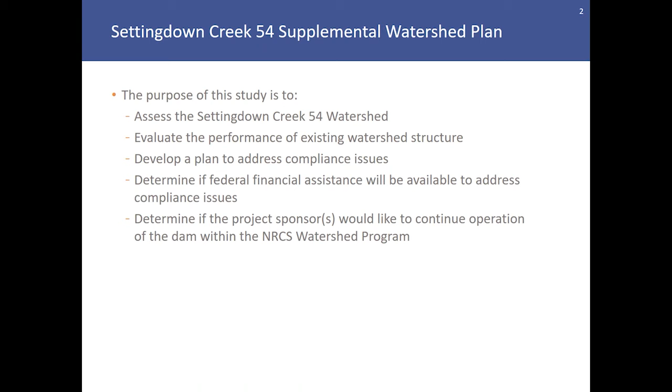The purpose of this planning study is to assess the Settingdown Creek Dam 54 watershed, as well as evaluate the performance of the existing watershed structure. The planning study will develop a plan to address any identified compliance issues with the dam and determine if federal financial assistance will be available to address those issues. Also, the planning study will result in the determination of whether or not the project sponsors would like to continue operation of the dam within the NRCS watershed program.

Public participation is of great importance to the planning process. The objective of our public participation plan is to inform you and other watershed stakeholders of the planning effort. A series of public meetings are required.

The first and second public meetings included a brief history of the NRCS watershed program, a brief history of dam safety, considerations for dam design, operation, and maintenance, an overview of the Settingdown Creek watershed and the dams included in this planning study, and also concluded with an opportunity for the solicitation of questions and comments regarding scoping topics and project opportunities and concerns.

The second public meeting included the presentation of a list of potential rehabilitation alternatives for the dam. The first public meeting was posted to Schnabel's YouTube channel from August the 7th until August the 17th, 2020, and the second public meeting was available from December the 18th until January the 4th, 2021. Please note that the first and second public meeting presentations have been reposted to Schnabel's YouTube channel for those interested in viewing the presentations and the content described above.

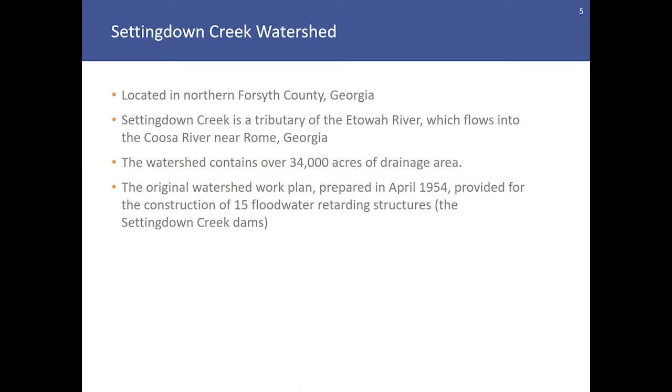The Settingdown Creek watershed is located in northern Forsyth County, Georgia. The creek is a tributary of the Etowah River, which flows into the Coosa River near Rome, Georgia. The watershed contains over 34,000 acres of drainage, and the original watershed work plan, which was prepared in the early 1950s, provided for the construction of 15 floodwater retarding structures known as the Settingdown Creek dams.

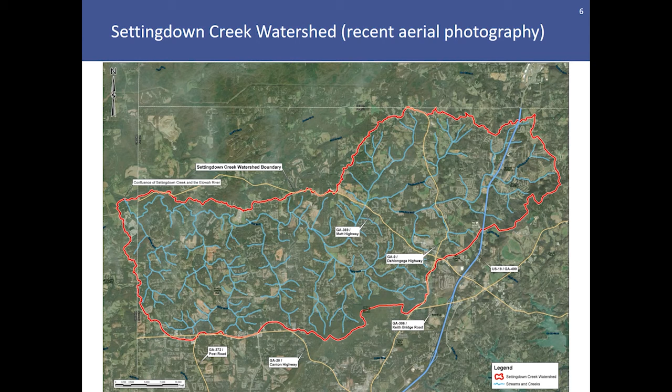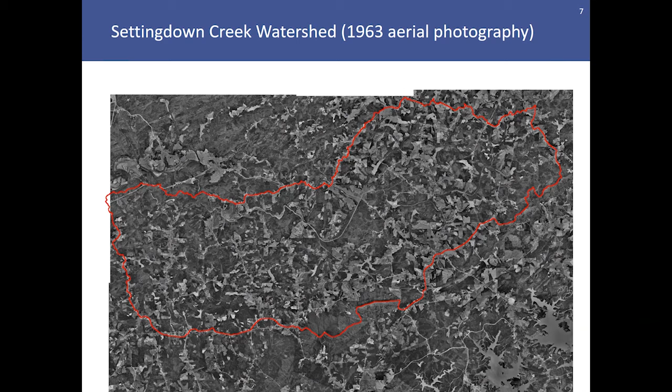This slide presents a delineation of the watershed overlain on aerial photography from the early 1960s, which would have been taken shortly after the construction of most, if not all, of the Settingdown Creek dams. As you can see, there have been some changes to the land uses in northern Forsyth County within the watershed since the original construction of the dams.

As part of the supplemental watershed planning study, several focal points of analysis and study are involved. We, the planning team, considered upstream areas that are subject to flooding, as well as the need for potentially needing additional storage upstream of the dams. We also looked at downstream areas with regard to storm flooding, as well as hypothetical breaches of the dam and the areas that would be impacted as a result.

The hydraulic capacity of the existing spillway outlet works was assessed and evaluated for several different storm events. Additionally, economic and social benefits associated with the project were considered, along with an assessment of environmental and cultural resources in the project's vicinity.

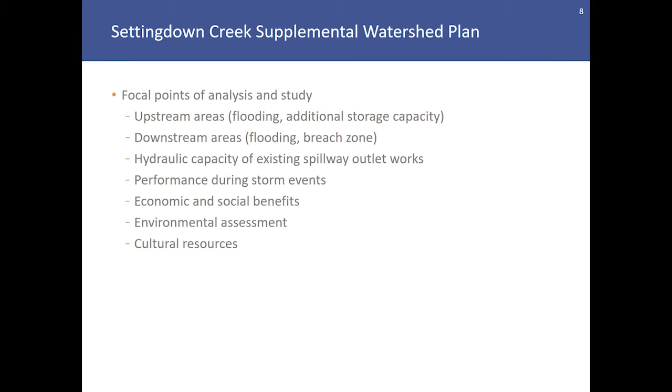With regard to Settingdown Creek 54, which is the subject of this presentation, the dam meets Georgia Safe Dams Program criteria to be considered a Category 1 or high hazard potential dam. This means that failure or improper operation of the dam would likely result in the loss of human life. The dam requires an operating permit from the Safe Dams Program.

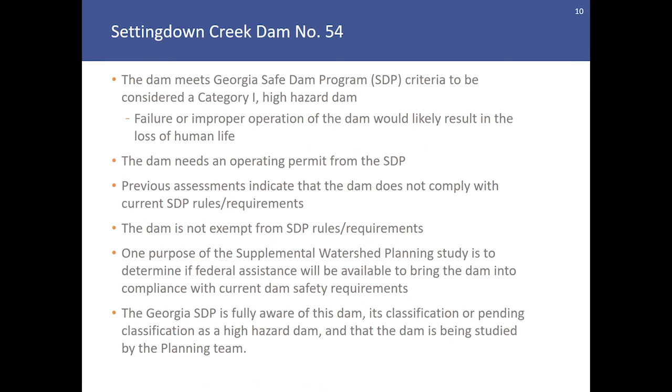Previous assessments of the dam indicated that the dam does not comply with current SDP rules and requirements. The dam is not exempt from these rules, and the purpose of the planning study is to determine if federal assistance will be available to bring the dam into compliance with current safety requirements. The Georgia Safe Dams Program is fully aware of this dam, its classification as a high hazard dam, and that the dam is being studied by the planning team.

Original design features for Settingdown 54 include that the dam was not originally designed as a high hazard dam. Development downstream of the dam has occurred since its original construction, increasing the hazard classification from low or significant to high hazard. The purpose of the dam is flood mitigation, with a secondary purpose of sediment accumulation and storage.

The principal spillway system for the dam is comprised of a reinforced concrete riser structure and nearly horizontal pipe or conduit that conveys flows from the lake through the dam to the outlet channel at the downstream toe of the dam. There's also a vegetated earthen auxiliary or emergency spillway located adjacent to the dam to convey flows associated with low frequency, high intensity storm events.

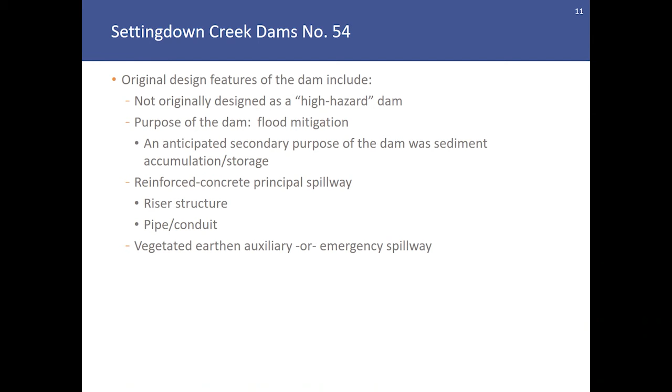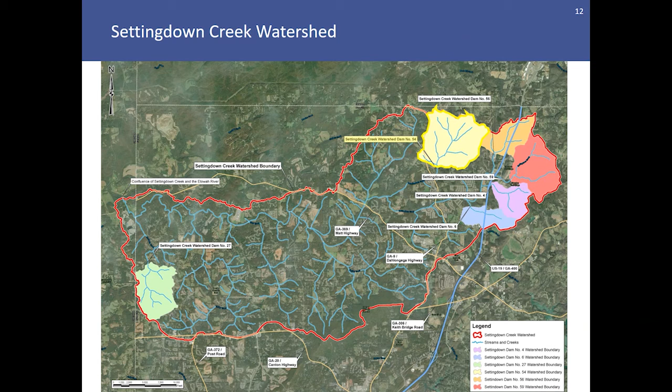northeast side of the watershed in this view. The dam is located north of the intersection of Dahlonega Highway, Highway 9, and Burruss Road. The dam was constructed in 1954 and appears on the National Inventory of Dams. It has a surveyed height of approximately 27 feet and a drainage area on the order of 2.5 square miles.

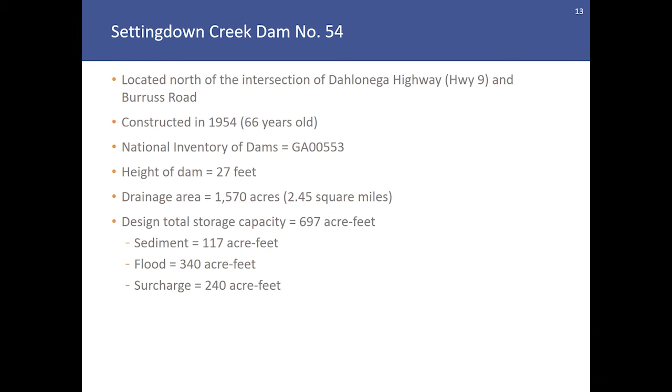The total storage capacity that the dam was designed to have is 697 acre-feet. That includes sediment storage, flood storage, and surcharge flooding storage above the auxiliary spillway control section.

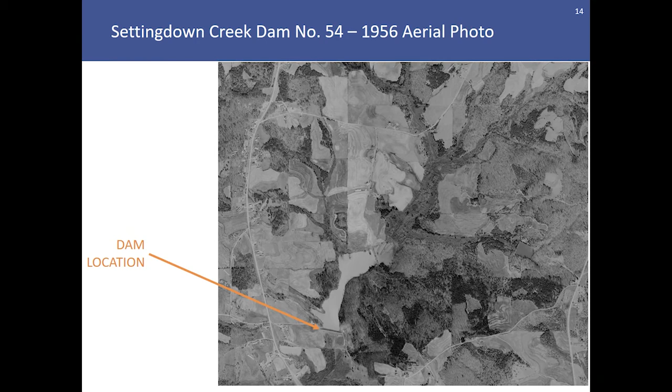This slide presents an aerial photo from the 1950s, which would have been taken shortly after the completion of the dam. You'll note the location of the dam and the areas surrounding it, and we'll fast forward to an aerial photo taken more recently and note that some development has occurred both upstream and downstream of the dam since its original construction.

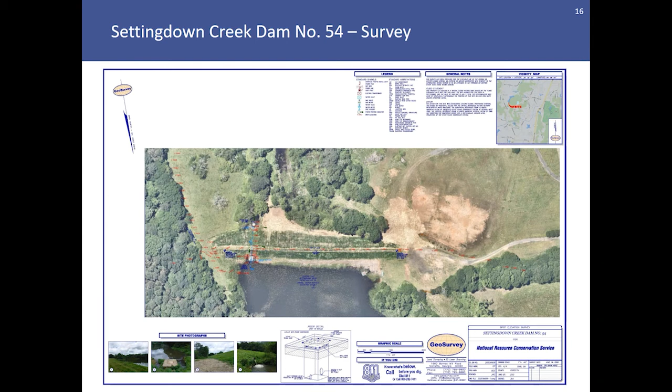The auxiliary spillway channel, the vegetated spillway, is located to the left of the lake in this view and generally runs in a bottom to top direction from this view. You'll also notice that the dam has been cleared and the lake is at the bottom of this view.

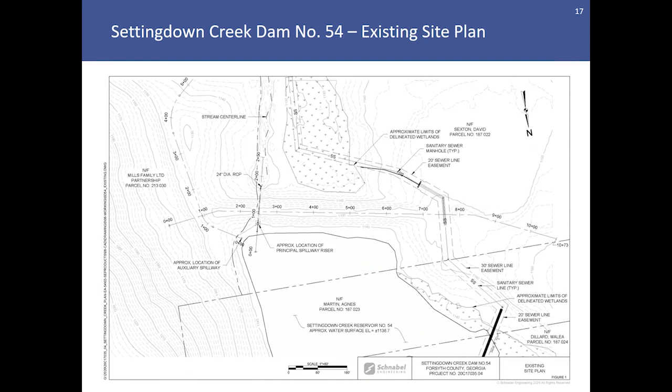Also of note, there is an existing sanitary sewer line that runs immediately to the right of the dam in this view and then turns down into the floodplain and runs relatively parallel to the outlet channel for the dam.

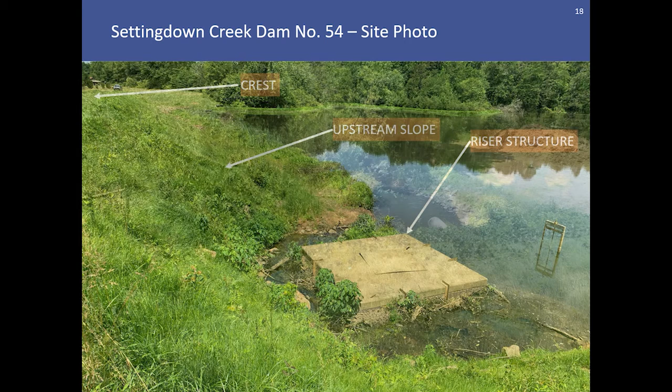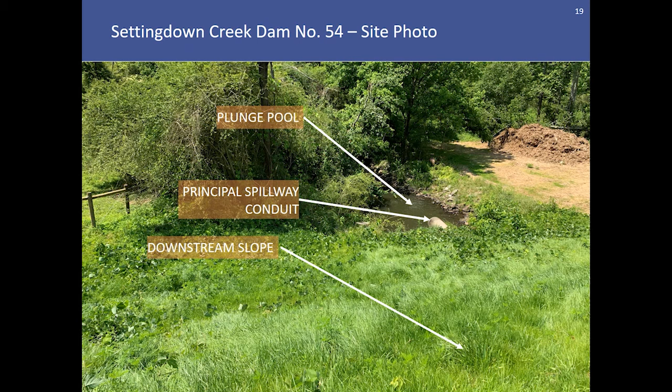Some invasive species, predominantly Chinese privet, were identified in the upper reaches of the watershed for this dam. The environmental survey resulted in the finding of no protected species in the vicinity of this dam.

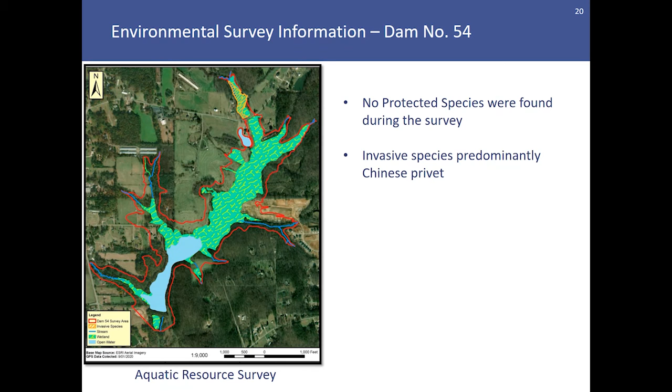The dam, being greater than 50 years old, is technically eligible for the National Register of Historic Places. However, the Cultural Resources team does not recommend placement of the dam on the registry. No additional cultural resources work is recommended for this dam.

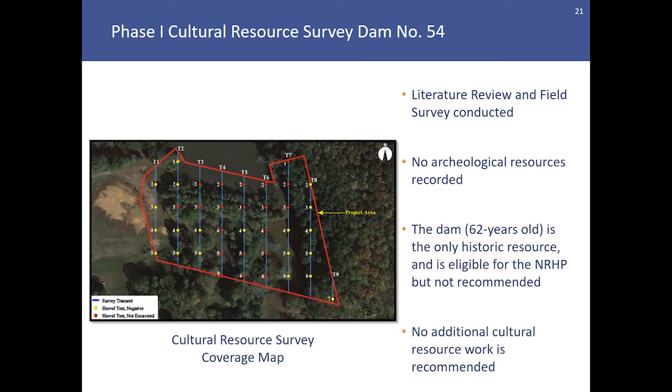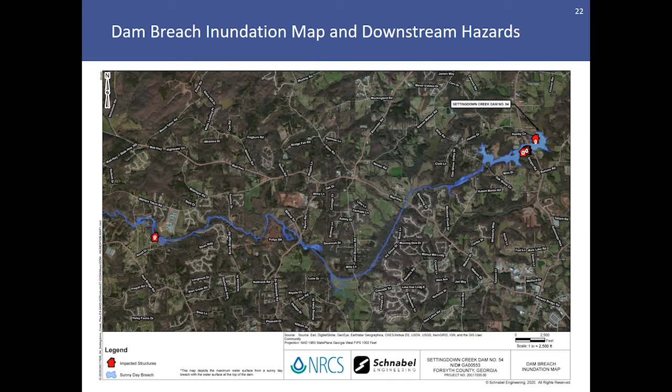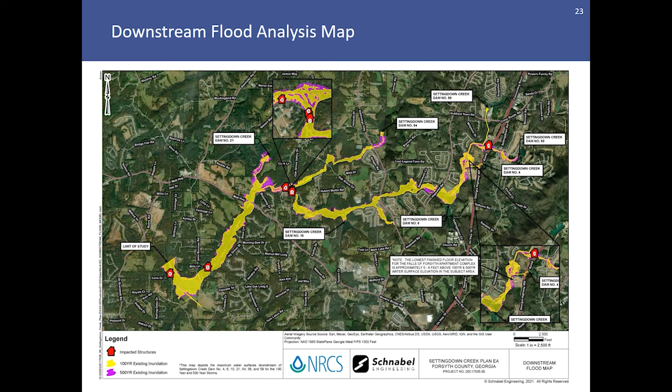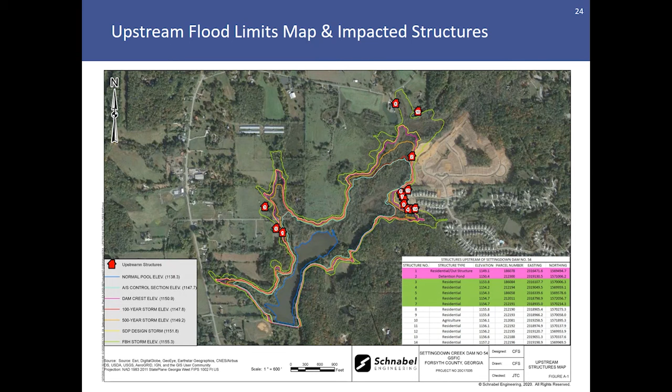There are also several homes around the upper limits of the flood levels that would be impacted during the NRCS design storm event for this dam, known as the freeboard hydrograph storm event. This event would equate to approximately 30 or 32 inches of rain over a 6-hour period.

We'll review some of the existing deficiencies with this dam that have been identified as part of the planning study. As indicated previously, the dam was recently cleared about a year ago during the summer of 2020.

Structural deficiencies with the outlet works include that the riser is embedded in the embankment and silt has accumulated, hindering access to underwater portions of the riser. This means that the existing gate is not accessible and is likely not functional.

A closed circuit television inspection of the principal spillway conduit was performed, and the interior of the pipe after review appears to be in acceptable condition for continued use in its current state.

Existing hydraulic deficiencies for the safe dams level storm event include that the dam overtops by almost a foot during the 1/3 probable maximum precipitation storm event, which is the SDP design storm for this dam.

With regard to NRCS criteria, the auxiliary spillway engages during or prior to the principal spillway hydrograph storm event, which is an evaluating storm event for auxiliary spillways.

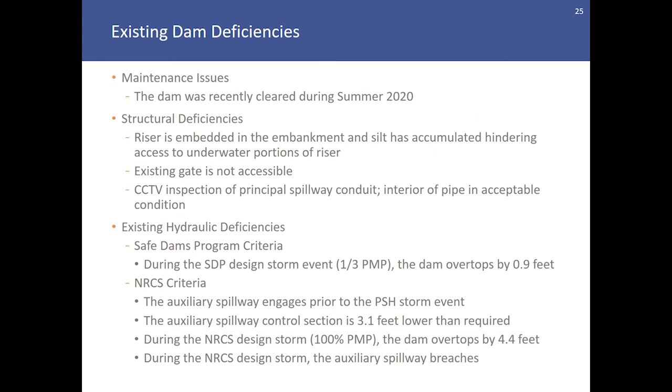The auxiliary spillway control section is too low and would need to be increased by 3.1 feet to meet NRCS requirements for earthen spillways. The dam overtops by over 4 feet during the NRCS design storm, which is 100% of the PMP, and the auxiliary spillway would fail or breach during the design storm.

The planning team has shortlisted 3 alternatives to address concerns, deficiencies, or issues with the Settingdown Creek Dam number 54.

The first alternative is a no action alternative, which simply means that federal investment would not be utilized to improve or upgrade the dam.

The no action alternative would require that the dam meet criteria from the Safe Dams program at the state level for a high hazard dam.

The no action alternative could be either the permanent breach of the dam or a rehabilitation of the dam to meet state criteria. The criteria for selecting whether or not a breach or rehabilitation is selected for the no action alternative is based on the total installation cost for the project.

Removing the dam itself, the construction related to that may be less expensive than rehabilitating the dam, but also considerations have to be given to downstream areas and how to protect those against flooding that would become more apparent in the event that the dam were removed.

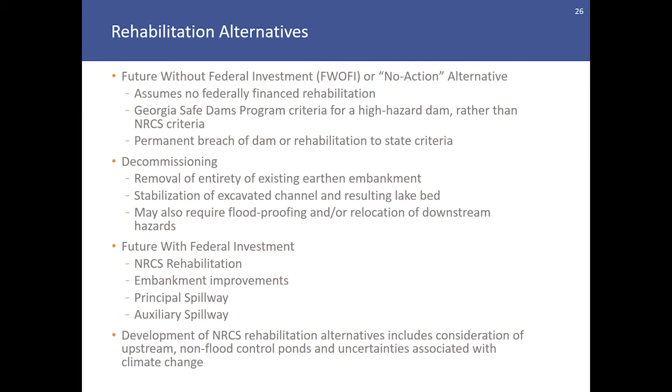So the no action alternative for this dam would involve the permanent breach of the dam. The planning team has studied this, and from a cost, environmental, and economic perspective, removal of the dam in the no action alternative would be preferred over trying to rehabilitate the dam to meet Safe Dams program requirements. This breach would not involve complete removal of the embankment, but only a portion where the principal spillway is currently located.

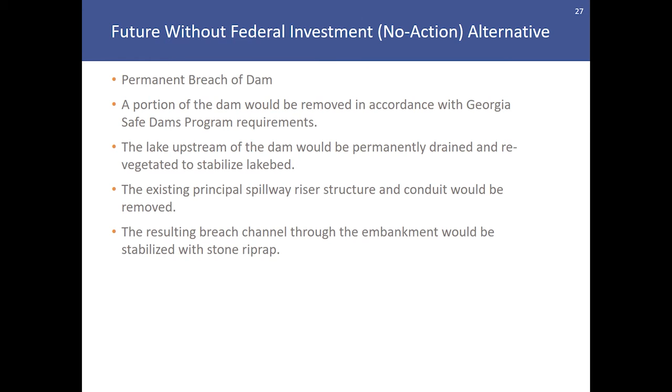The resulting channel would be stabilized at the base with riprap, and portions of the excavation will be vegetated. The resulting lake bed would also be stabilized with permanent vegetation. Here is a site plan that indicates what the Safe Dams program level breach of the dam would entail.

The breach would result in the permanent draining and loss of the lake were this alternative to be instituted. The existing principal spillway system would be removed, and the material excavated from the breach would likely be disposed of generally in the staging area located at the right side of the view here. And just to reiterate, no federal funding would be used for this activity.

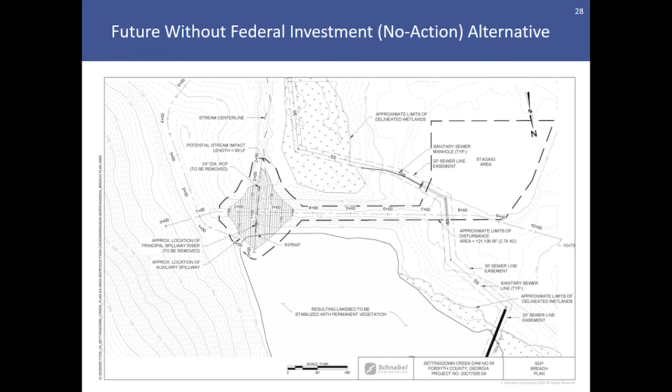The decommissioning alternative would involve the complete removal of the dam and would need to be performed in accordance with NRCS requirements for dam decommissioning. It would also involve reconnection of the grades through the dam footprint to the original floodplain, stabilization of the lake bed, and stabilization of the primary channel through the footprint of the dam with riprap.

This alternative would improve flooding benefits upstream of the dam, but the downstream flood benefits currently provided would be lessened or lost. The planning team has performed an economic analysis associated with the removal of the dam and has quantified the benefits that the dam currently provides, as well as the loss of those benefits if the dam were to be removed.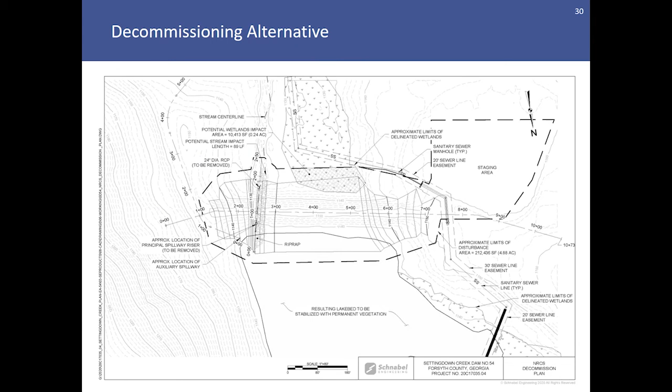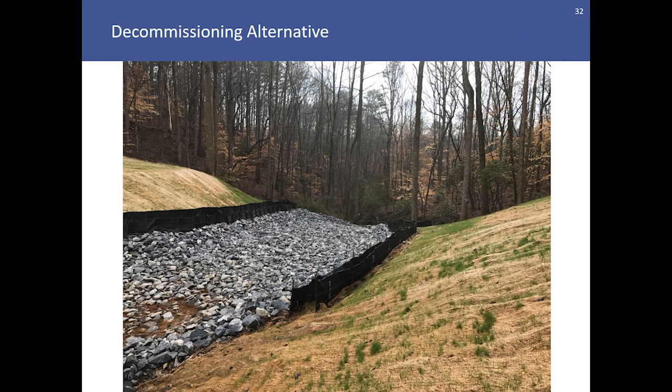Here's a couple of photos with examples of removals of the dam and stabilization of the primary channel through the dam. You can see the riprap lining where the flows are consistent, and areas that are disturbed as a result of removal of the earthen embankment would be stabilized with permanent vegetation.

The final alternative that we will discuss today is the future with federal investment. This alternative would allow the local sponsors to have access to federal funding to offset the costs associated with rehabilitating the dam to NRCS standards.

This alternative would involve raising the crest of the dam to the current maximum water surface elevation associated with the design storm event, regrading the upstream and downstream slopes to 3:1, constructing a riprap-lined wave berm across the upstream shoreline of the dam, decommissioning the existing vegetated auxiliary spillway by placing compacted earth fill up to the proposed dam crest elevation, and addressing or relocating the existing sanitary sewer to the right and downstream of the dam as necessary to accommodate the rehabilitation efforts.

A new principal spillway riser structure would be installed, and the existing spillway riser structure would be removed. Portions of the existing conduit would be reused, but extended in both the upstream and downstream directions to accommodate changes to the riser structure and the embankment. A riprap-lined plunge pool would be constructed at the downstream end of the conduit.

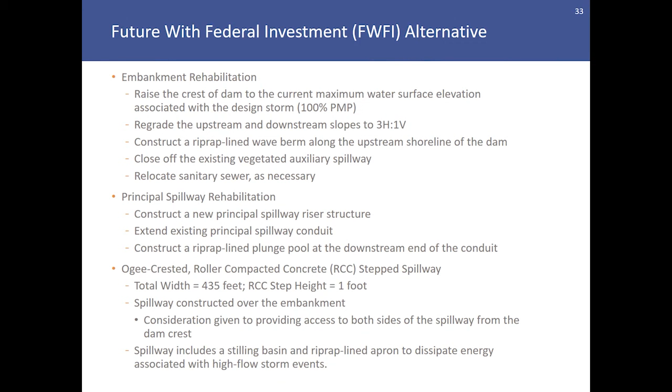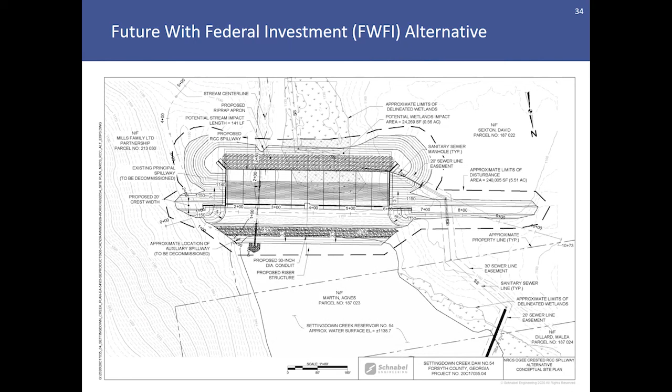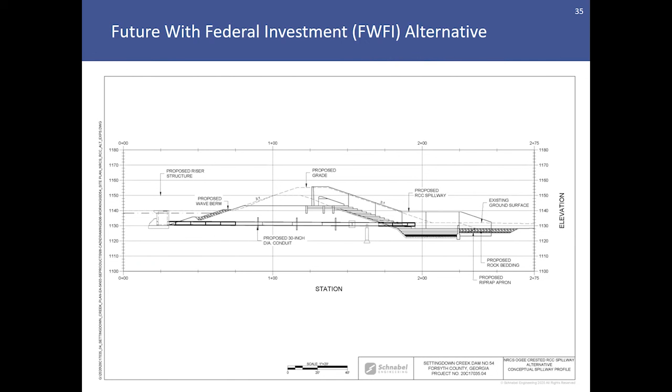Given that these spillways are only designed to engage during very low frequency, high intensity storm events, some owners prefer to cover the RCC spillways for aesthetic and maintenance reasons, and then grass can be established over these spillways in some cases. Here's another example.

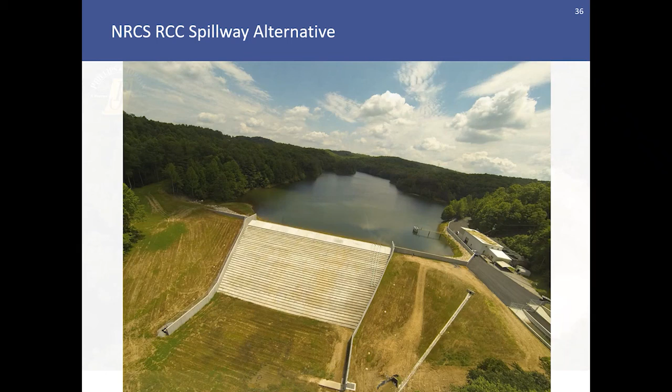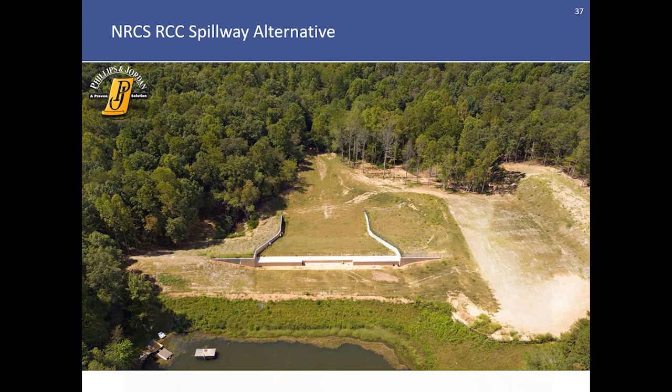This spillway does have an ogee crest and also involves placement of soil and grassing all the way up to the crest of the spillway. We've got another view from the side of this ogee crested spillway, and you can see how access from one side of the dam to the other would be accomplished with this layout.

Here's one more example of a spillway where the principal spillway discharges into the stilling basin for the auxiliary spillway. You can see at the base of the step spillway, which has been covered with soil and grass, where the principal spillway pipe is discharging that small flow of water at the base of it. This dam also features reinforced concrete sidewalls for the auxiliary spillway and a headwall system that allows for access from one side of the dam to the other.

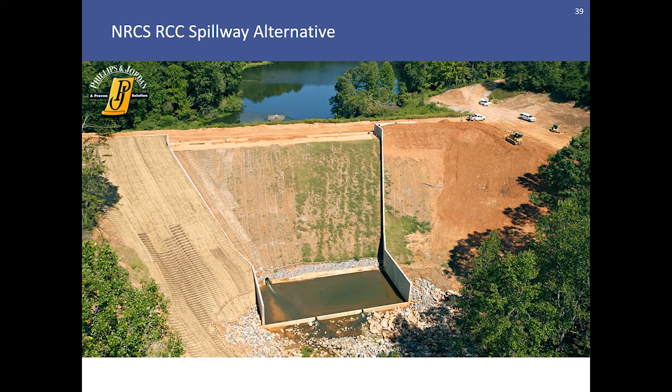As a result of the planning effort, the planning team has had several meetings with the project sponsors and representatives of the NRCS, and a locally preferred alternative will be presented for this dam as the future with federal investment alternative. This alternative will allow the project sponsors to obtain federal funding to assist in the rehabilitation of this dam. As just stated, this alternative would involve the construction of a new principal spillway riser structure and improvements to the embankment, including raising the crest of the dam, and the construction of the RCC step spillway with ogee crest over the embankment.

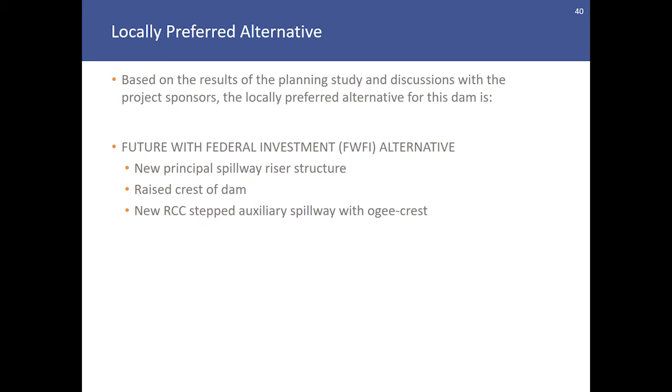As we stated at the beginning of the presentation, your participation and the participation of other project stakeholders is extremely important in the planning process.